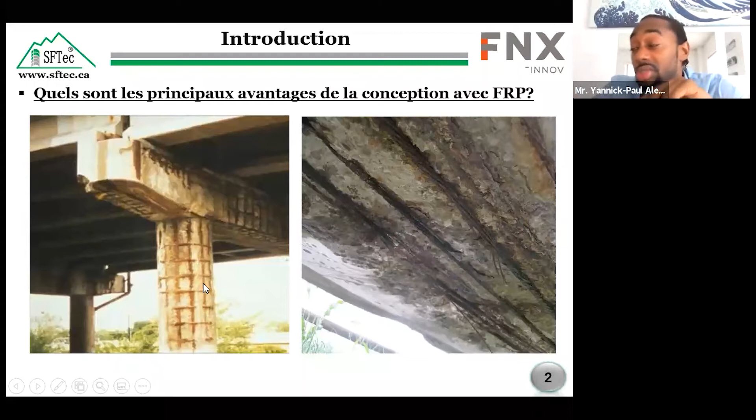Yeah, recently we finished a very good project for retaining walls supporting a slab with the city of Montreal using our rebars. So I would like the attendees to know, how was your experience with SFTec FRP bars for this project? SFTec teams provided good technical support. On the site, the bars came cut to the right size and bent to our specification.

In general, the installation went well because the rebar wasn't heavy, it was pretty lightweight. It was easy to manipulate everything, and finally the project was delivered to the city of Montreal within the promised time frame. So everything was on time and the service was pretty good.

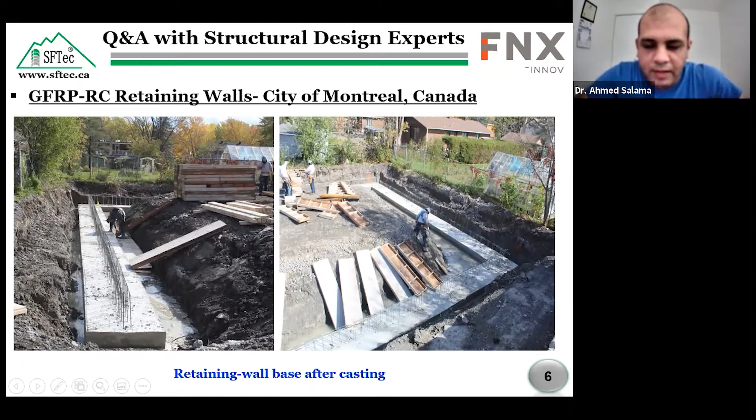Yeah, actually, we have main reinforcement in the retaining wall, which is a transverse reinforcement, and this amount could be achieved by design. I'm also wondering about the longitudinal reinforcement and the compression bars. How were these kinds of bars estimated?

Maybe I can answer. Can you repeat the question? Actually, Yannick, when you design a retaining wall, the first thing you do is determine the transverse reinforcement. Take a section and determine the transverse reinforcement. But we also have longitudinal reinforcement and the compression bars. So my question is, how were the longitudinal reinforcement and the compression bars estimated?

Okay, based on which code, I understand the question. The longitudinal and the compression reinforcement is determined using the American code, ACI 440.

So we use a specific equation for this, and after that we use the result of this equation to compare it to the Canadian standard provided in the CSA S806, I can't remember 806 something, and we select the maximum of the two results. I totally agree with you, because we don't have any equation for the longitudinal reinforcement bars and the compression bars, we don't have any equation. So I totally agree with you.

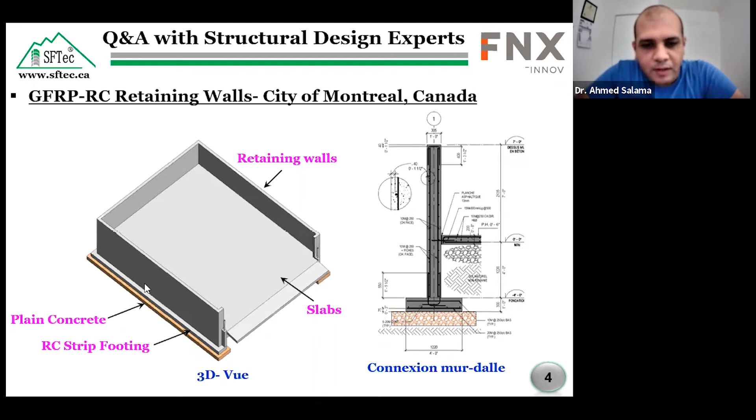Actually, some engineers have a confusion between the design with FRP and steel, and some of them imagine that they could design with steel because they are familiar with that, and after that replace the steel bars with FRP with the same diameter, everything. But we cannot, or we can, we don't know. So my question right now: can we design the structure with steel and then replace it with FRP in a 1:1 ratio? No, it's impossible. So we perform some design and compare steel with FRP, and we cannot say that this is a ratio 1:1. FRP has its own standard and code.

Sometimes the diameter could be different, and also the big difference is the compression behavior of the concrete reinforced by FRP, because the failure mode is pretty different. So we cannot say that if we use for a column 4 rebar 20M, we're gonna have the same diameter for the FRP. It's pretty different sometimes. So we can do the design in steel and do the design with FRP only for comparison. Sometimes for the pricing it could be useful, but we cannot say that it's the same. It's not the same.

Yeah, I totally agree with you that we cannot replace steel with FRP in a 1:1 ratio, but for comparison purposes we can. We can perform the design with the steel and the FRP and compare, to know if it will be economical or not, and that's it. In order to guide the designer to seek other solutions, in order to make the design economic and safe, and make the steel and the FRP comparable.

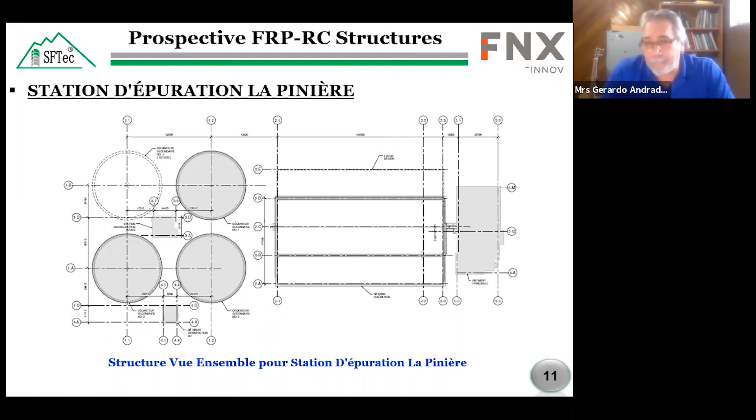On va trouver d'autres problèmes, mais je pense que ce type de situations pourront se régler. Il y a un point que j'aimerais ajouter, c'est qu'on pourrait toujours utiliser le système hybride. Des fois, si on attend des armatures en PRF, on pourrait mélanger un peu avec l'acier galvanisé ou standard. Ça, c'est une solution aussi. On a trouvé mélanger un peu d'autres produits. Ça marche aussi. Ouais. Okay.

Ce n'est pas seulement un par un comme on a discuté avant. Il faut vraiment que les experts comme vous-même, c'est vous qui devez dire ok, remplacer le PRF de 90 avec l'angle 90 de 10M par exemple avec une autre 12M d'acier ou n'importe quoi. On ne peut pas juste changer ou mélanger comme on veut.

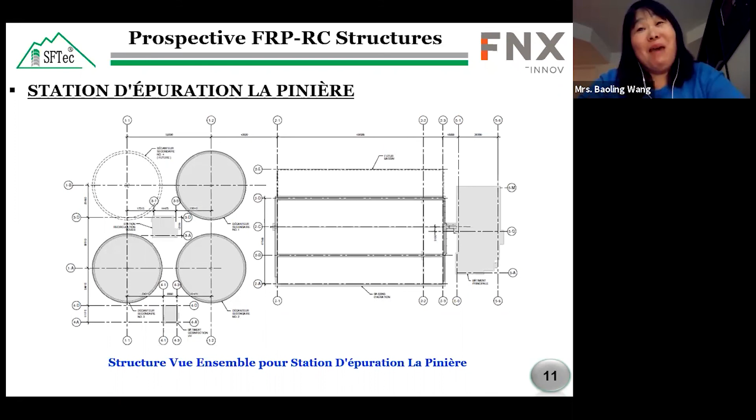Bon, mais merci, ça il faut beaucoup savoir, il faut savoir comme pour les aciers à galvaniser, il faut attendre très longtemps des fois aussi pour la livraison. Ça devient la même chose, je trouve. Oui, j'imagine. Ouais.

En tout cas, nous sommes honnêtement très contents de travailler avec vous. On espère de partager dans vos projets futurs, d'être engagés avec vous tout le temps. C'est toujours un plaisir et c'est toujours facile de travailler avec vous. On a un contact tout le temps avec vous les trois, moi et Dr Ahmed, et nous sommes très contents de faire ça avec vous aussi. Nous vous remercions. C'était un plaisir. Merci de votre temps.